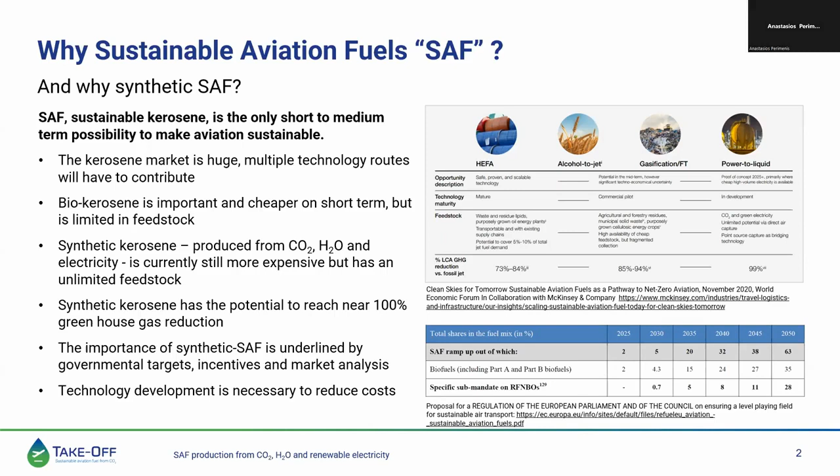So what we do within Takeoff is that we are developing a unique technology whereby CO2 is hydrogenated to kerosene via olefins. So we start either from flue gas emission or direct air capture, where CO2 is captured, and combine it with hydrogen, convert it to light olefins, further oligomerize it and hydrogenate it to higher alkanes, which is the blend of the stuff. The innovations are focused on developing and improving catalysts with high selectivity and efficiencies, next to reactors under industrially relevant technologies.

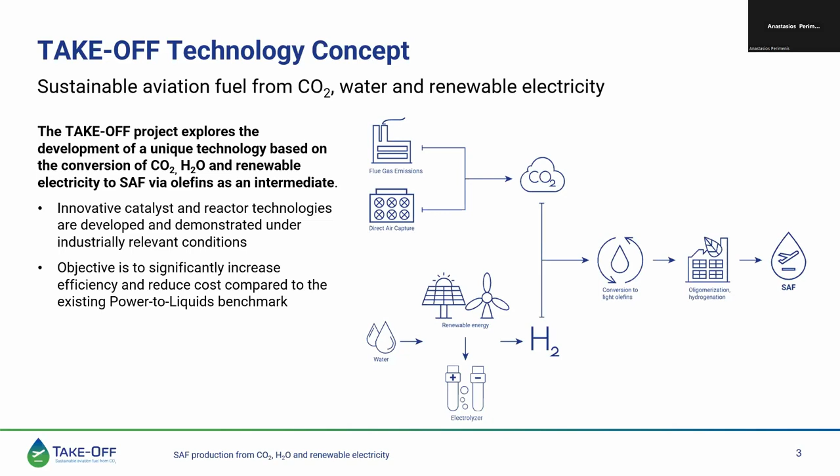So here we are working, for instance, with reactors that remove the water to shift the reactions to the right, so to produce more products than limited by the thermodynamics. The objective is to significantly increase the efficiency and reduce cost compared to the existing power to liquid benchmark, which is at the moment the Fischer-Tropsch reactions. So compared to the benchmark, we know that Fischer-Tropsch is industrially proven and certified for use as aviation fuel. This route is therefore the industrial benchmark for our comparison studies.

And we must say that we are not against, and we are not competing with the FT technology, because we also work on the reverse water gas shift reaction for producing hydrogen and CO at the right ratio. This is an important parameter to control the reaction output, because, for instance, for kerosene, the ratio of hydrogen to CO is 2.1.

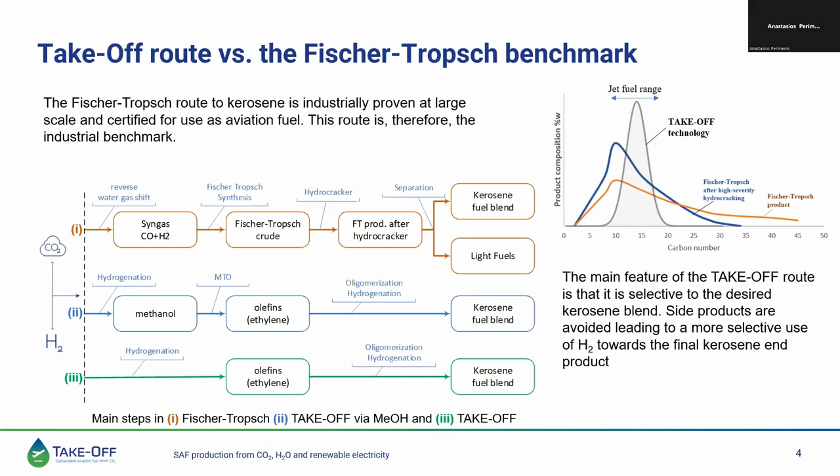RWE premises. The compliance and emissions, so our partners at FEV in Aachen are working on the structure property relationship, and then to see how to minimize the emissions, soot and NOx, etc. Techno-economic analysis and life cycle assessment happens at the SDU, at the university in Denmark. Disseminations is in the hands of CO2 Value Europe.

So to give you a glance of the experimental setups that we have and that we are using for executing our experiments. So we have the demo plant in RWE. We see here a rapid compression machine for NOx measurements. We see a oligomerization test where you have polymerizations of light olefins to higher olefins. And you see also our reactor.

We call it SIENNA for the removal of water, and then the production of methanol or DME, which is then further reacting. But at the moment, we are also working on how to go directly from CO2 and hydrogen to light olefins.

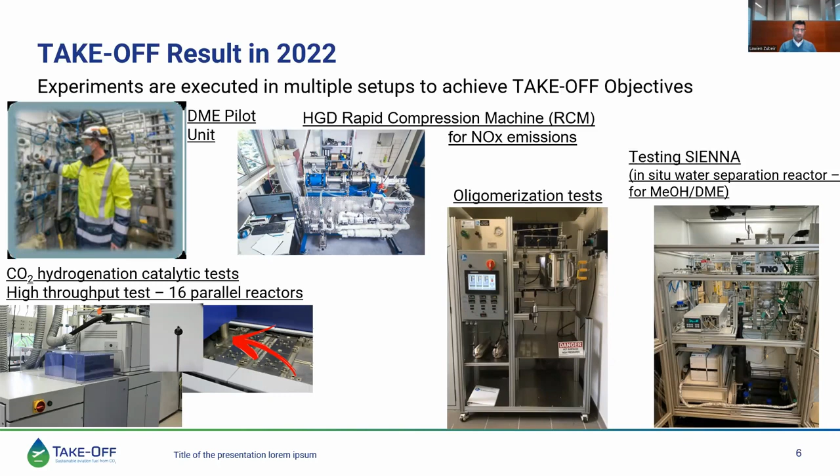So what do we expect from this research? What's the impact of the TAKE-OFF project? Well, there are a couple. So we are developing the process for the conversion of CO2 to methanol and DME and increase the technology readiness level from 3 to 5, because these intermediates can also be used in other markets. They have their own markets.

Advance an innovative olefins to jet fuel process from TRL 3 to 4, and investigate the compliance and emissions of the produced SAF, because we want to use it as a drop-in product. So it must, of course, comply with the existing requirements. We want also, within the RWE premises, to demonstrate the entire technology. So from CO2 capture, water conversion to hydrogen using electricity, and converting it all the way to kerosene.

And the techno-economic analysis will be in place to, of course, determine the efficiency, the footprint, and the sustainability and cost reduction of these processes. We expect a carbon and hydrogen efficiency of 25% above Fischer-Tropsch, because we have a narrower product distribution for the jet fuel blend. We don't expect sulfur because there's no sulfur in the feed. There will be also no sulfur in the product. Lower emissions, because the product is more optimized than the usual one that's used now.

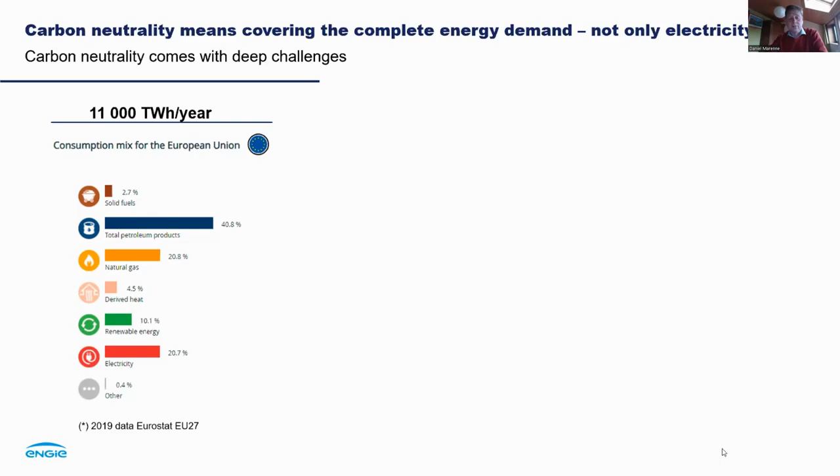Only 20% of the final energy use is today electricity, and the rest is a bit of renewable, 10%, but for the rest it's fossil fuel with petroleum and gas. And electricity will increase, because this is the cheapest way to achieve carbon neutrality, to electrify everything that is feasible. But some things are not feasible to electrify, and also you can electrify, but at the end of the day you need cables or infrastructure, and the infrastructure will not be sufficient.

So that's why we will use renewable heat and more, but it will remain quite limited, because simply the feedstock is limited. Carbon capture and storage, we see now that it's running, and it will continue. And hydrogen and power to X, like CCU, will take a place, but be aware that it is a very expensive way, because it is more expensive to use hydrogen than pure electricity, simply because you need to use electricity to go to hydrogen. So from an efficiency point of view, you will go only in the hard-to-abate sectors, where you cannot electrify.

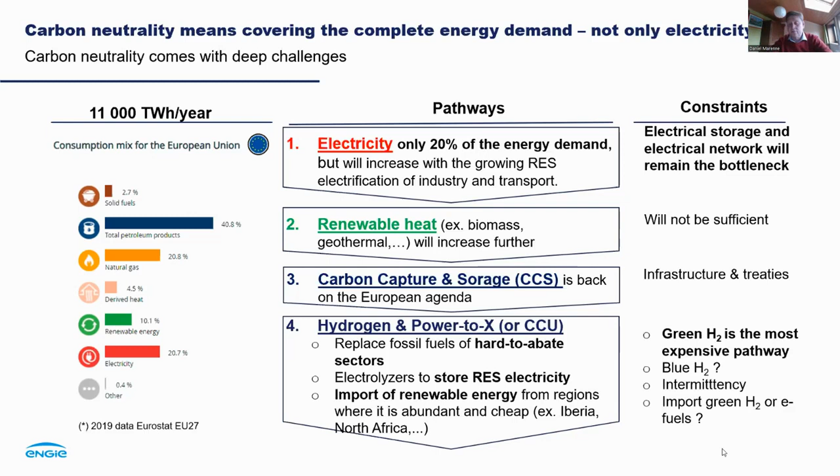So that's why for e-fuels, what we clearly have to target is where you cannot use electricity. For a single car, for instance, an electric car seems to be better, but for trucks and for aviation, clearly it's another story.

REPowerEU and the current stress on the energy market have shown at least one thing: we have to accelerate absolutely and desperately the development of all the renewable electricity that we can in Europe. Clearly the development will be wind and solar. Wind more for the Atlantic part, with the UK, Ireland, and all the North Sea coast up to the Baltic Sea, and a bit in the Mediterranean Sea also, as you see. And solar will be more in the south, of course, because there is more sun in the south. But once more, these are not base load production.

So if we want to increase that, we absolutely need to develop some storage capacity for electricity, or simply transform the electricity produced, as fast as possible, into a valuable molecule that can be used afterwards for the rest of the economy.

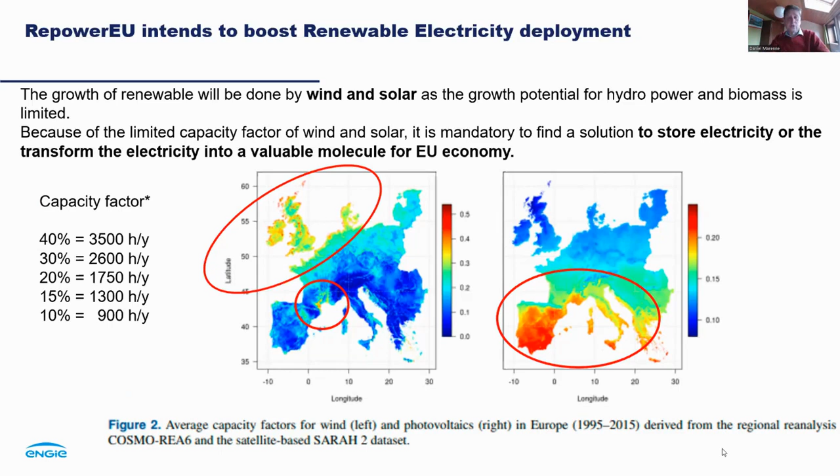When we speak about the storage of electricity, you see that there are lots of possibilities, like batteries, of course, pumped hydro storage, thermal storage, because we will more and more see electric boilers that transform electricity directly into heat to use it, or eventually to produce electricity again. And then we have hydrogen and eventually power to methane, which allows storing a large quantity of electricity that can be used afterwards.

But of course, due to efficiency, the best is most probably not to use this molecule directly to reproduce electricity, because you lose a lot of energy. Power to gas to power is about 30% efficiency. So if you produce 100 megawatt hours of electricity with solar, for instance, transform it into hydrogen and go back to electricity with a CCGT, gas, or hydrogen, you will have only 30 megawatt hours of energy. It means that you will lose a lot. So if you can produce some other valuable molecule, it is much better than going back to electricity.

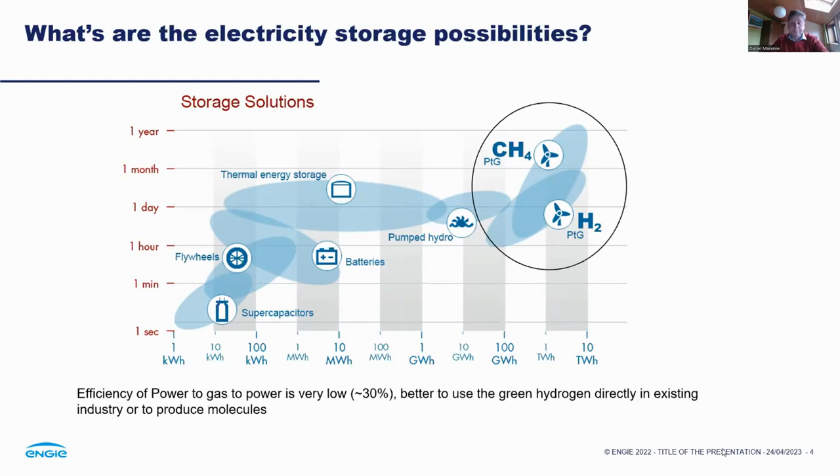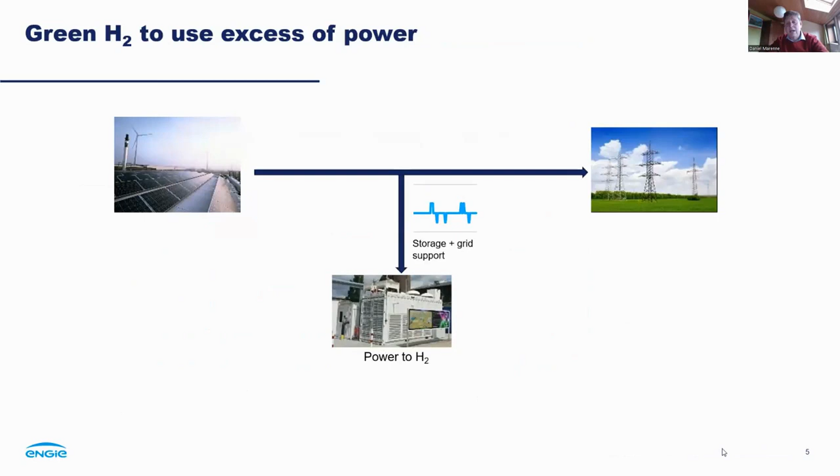So basically, that's where the hydrogen will play a role. So you have a lot of electricity, you don't know exactly what to do, then you transform this electricity into hydrogen. Then today, you can ask yourself, okay, what can I do with this hydrogen today? So today, you can use the hydrogen for two major sectors, I would say, in Europe. This is the ammonia production for basically fertilizer, and these are the refineries.

The problem is that today the ammonia sector is absolutely not ready to pay any premium on green hydrogen. We see, by the way, that with the increase of price of the gas, the first installations to stop activities were the ammonia production, basically everywhere in Europe. In UK, I saw an ammonia plant just shutting down because of the price of energy. So clearly, there is no willingness to pay an additional premium for green hydrogen for the ammonia, at least in Belgium.

The refinery: clearly, we will electrify more and more the mobility. So as a consequence, the refinery will decrease. So basically, we will need less refinery, but for the refinery, clearly there is a willingness to pay an additional premium on green hydrogen, because simply they can sell it then as green fuel. So it's a sort of CCU, I would say, but with existing assets. You have, of course, new assets where you can use green hydrogen.

This is the green steel, so the DRI, direct reduction iron, to replace the current blast furnace. But as it is to replace blast furnace, it means that you need a lot of investment upfront in order to develop this technology, and without infrastructure, it's quite challenging to develop these things, because you need a lot of hydrogen for the steel production, and if you have no transport and storage infrastructure, it will not be developed.

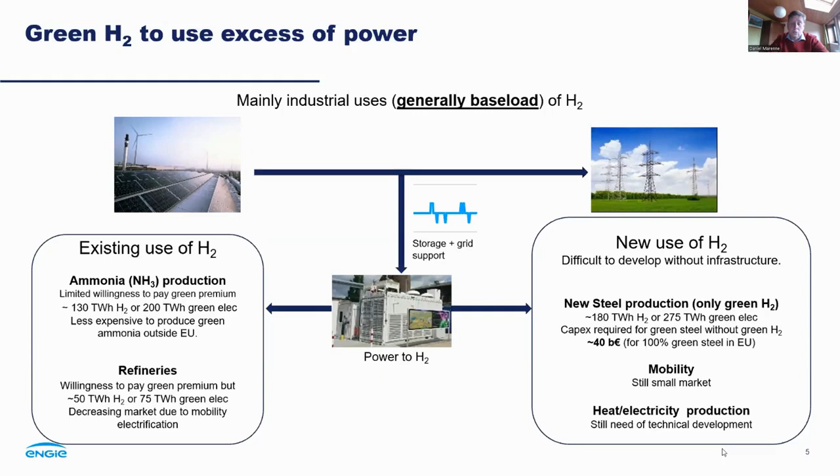And then it comes to another challenge with the hydrogen economy: today there is very, very limited infrastructure to transport the hydrogen, so it has to be developed, because simply this infrastructure is only sized for the current use of hydrogen. So if you want to develop, you need somehow to have a business model. And also, to store the hydrogen in big quantity today, the only proven way is a salt cavern, but it's not used for hydrogen today, though there are some demo projects and it will come.

But even if you imagine transforming all the salt caverns used today for gas storage into hydrogen, you have to keep in mind that with the energy density of hydrogen, you will lose a lot of energy storage possibility, because you divide by 4 the quantity of energy you can store with hydrogen compared to natural gas. So in Europe, today we have 1,200 terawatt hours of gas storage capacity, with only 200 terawatt hours in salt caverns. And if you transform these salt caverns into hydrogen, it's only 50 terawatt hours. So it will not solve the problem of storage of energy.

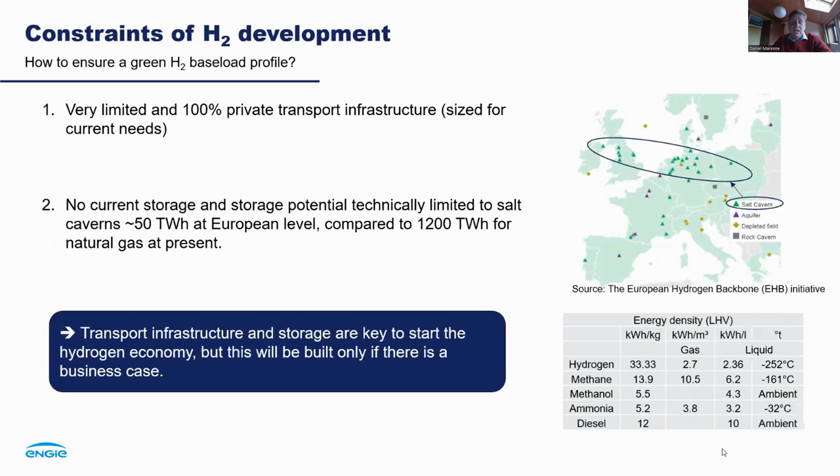And I will add to that, if you have no big project with big possibility to implement infrastructure and storage, you will never start, in fact, the hydrogen economy. So clearly, the hydrogen economy will need some, I would call it, iconic projects in order to develop this infrastructure. As I mentioned before, the business model is quite challenging. So who is really able and who wants to pay a premium? And that's where SAF and other e-molecules, e-fuels, come into consideration.

Today, it's obvious that in aviation, you will never go only with green hydrogen, because simply, once more, the energy density of hydrogen is too small compared to kerosene, and so you will always need kerosene for your planes. And as mentioned by the previous speaker, it's a lot of energy.

If you take only the 5% of renewable SAF, so bio and e, that is needed in Europe in 2030, it's already 40 terawatt hours. So it's a big volume.

In the shipping industry, you have the same trend. Shipping is now also pushed by Europe to add some renewable fuel. So you will have LNG, methanol, eventually e-diesel. But today, obviously, we see mainly e-methane and e-methanol as candidates to go for carbon neutrality. And once more, it's also a huge volume.

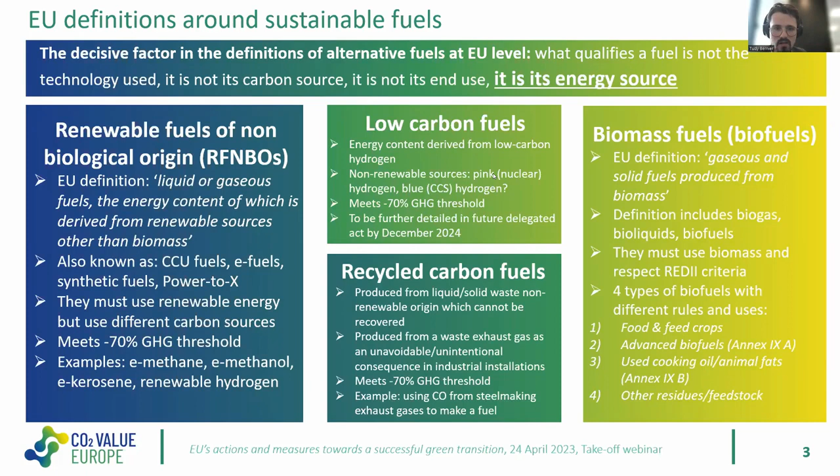And then the last ones, as was already mentioned, under EU law these are referred to as biomass fuels. This is essentially biofuels. You have a number of criteria that must be respected under the Renewable Energy Directive revision, so we refer to it as RED 2. There's 4 types of biofuels that can be in there, but maybe more relevant to this group and to this webinar are the definitions for sustainable aviation fuel.

So we hear a lot about SAFs. We have to bear in mind that SAF is the umbrella term, right? So it's all the fuels that are considered as sustainable, and it's essentially 3 of them. So it's synthetic aviation fuels, which is effectively RFNBOs for aviation. So what I just mentioned, you have your energy content that is coming from renewable sources other than biomass. And then for biofuels, it's only 2 categories that are considered, at least in the proposal that was made by the Commission.

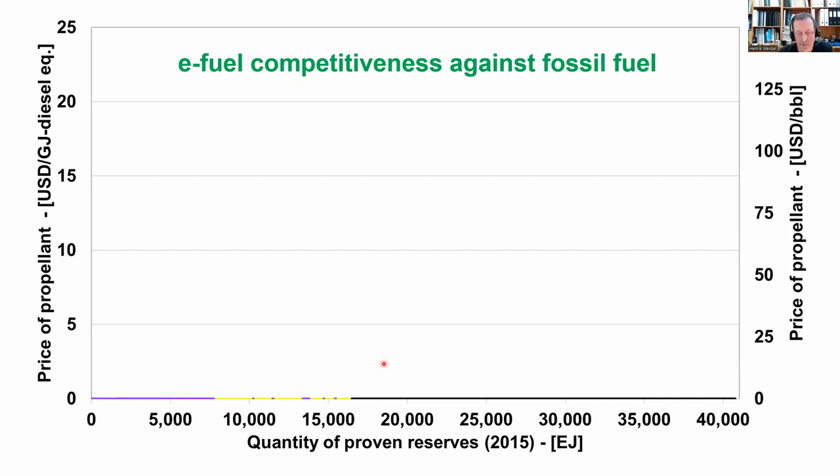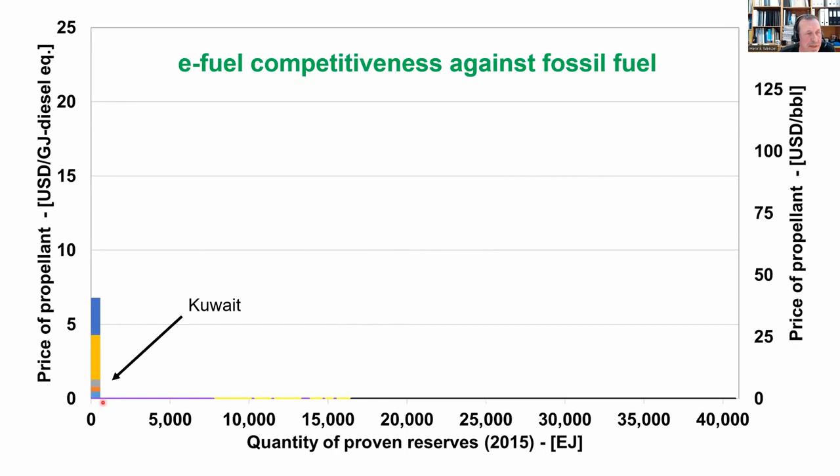So the cheapest place, this is country by country, the cheapest place in the world to produce a diesel equivalent out of fossil fuels is Kuwait. The first three contributions in the bar graph here are the mining, the capex and opex and administration of mining. Then the orange is the refining, and the blue is the distribution logistics until the fueling. So this is the cost of producing a diesel from the Kuwait reserve.

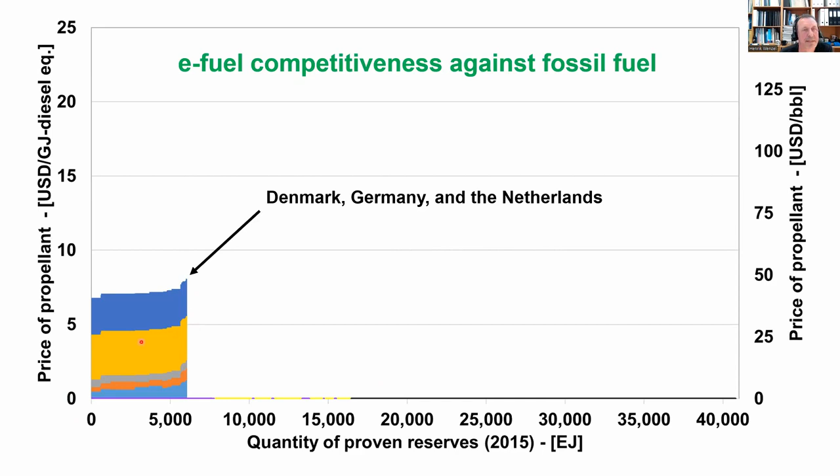The next is Oman, smaller quantity, a little bit more expensive. And as you go, here comes Denmark, still the oil reserves, small quantity together with Germany and the Netherlands. If we go to Canadian oil, this is the shale oil that is pretty much more expensive. You see, meanwhile, you have the gas reserves here where the refining part is bigger because you need to do gas to liquid, which is more expensive.

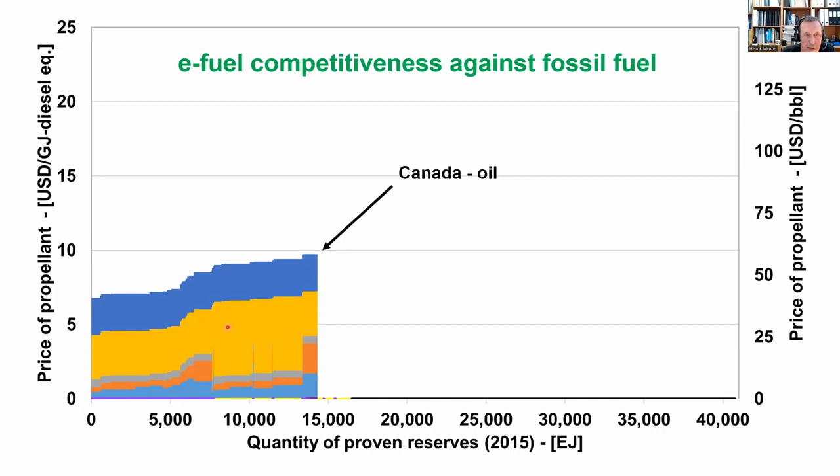Looking at the coal, the Russian coal is the cheapest coal reserve to do this from. A bit more expensive, and all the way up to the most expensive, which is the South Korean, Japan, Turkey, and Iranian coal reserves. So that's the total sum graph of the cost of producing a diesel equivalent from fossil reserves.

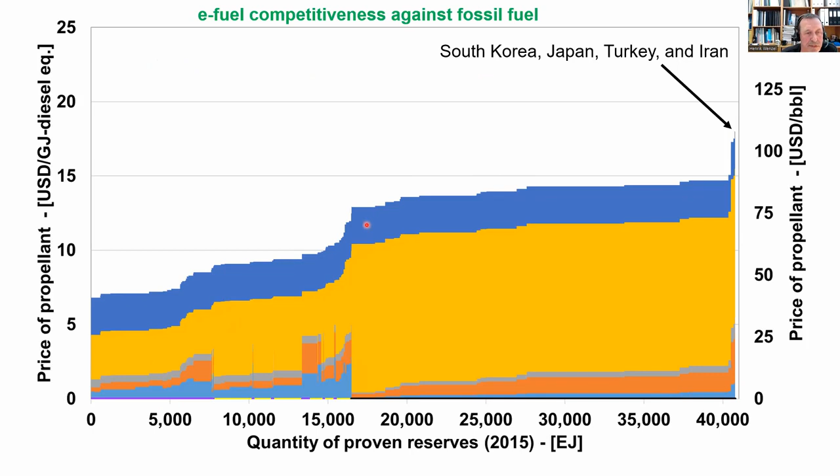If we are to stay below 1.5 degrees centigrade temperature increase, remember this was from 2015, we could only use what is to the left of this line. All the other had to stay in the ground, otherwise we couldn't make it. And for 2 degrees, this is the quantity. So that allows us, of course, to understand if we are to find sustainable alternatives that can outcompete these on pure market terms, what should be the cost of those?

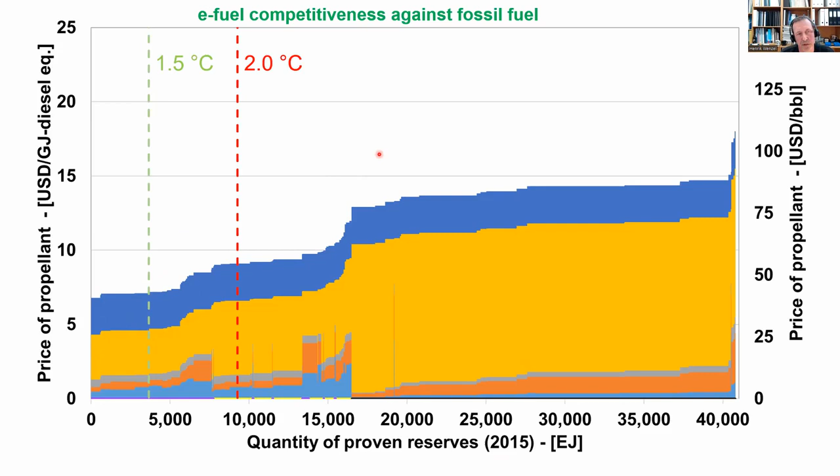And if we take a look, this is it. So to succeed in competing with our sustainable alternatives like the e-fuels, just on a pure market competition basis, meeting the climate target of 2 degrees, we need a cost of something around $9 per gigajoule of diesel equivalent, and something around 7 if we are to stay below 1.5. So this is kind of a nice target to understand.

Can we do that is the next question. We studied a huge variety of biofuels and e-fuels and even electrification and so on to understand to what extent could we do this.

And the lowest cost of e-fuels, electrofuels, back then we found was $22 per gigajoule diesel equivalent. That is equivalent to $0.75 per liter. And that was assuming an electricity cost behind the hydrogen production of $18 per megawatt hour of electricity. That is equivalent to very cheap solar power back then. As those of you who know these numbers will realize, this is pretty cheap.

This is, of course, diesel, but the proportion, if it were to be jet fuel, is just about the same. So you see, this is from 2.5 times more expensive than the cheapest diesel to 50% more expensive than the most expensive diesel. So it is a pretty cheap aviation fuel that we have assumed here by 2040. It is difficult to get cheaper than that. Let's take a look then. I'll go back to what it would take in terms of preconditions to then be competitive anyway.

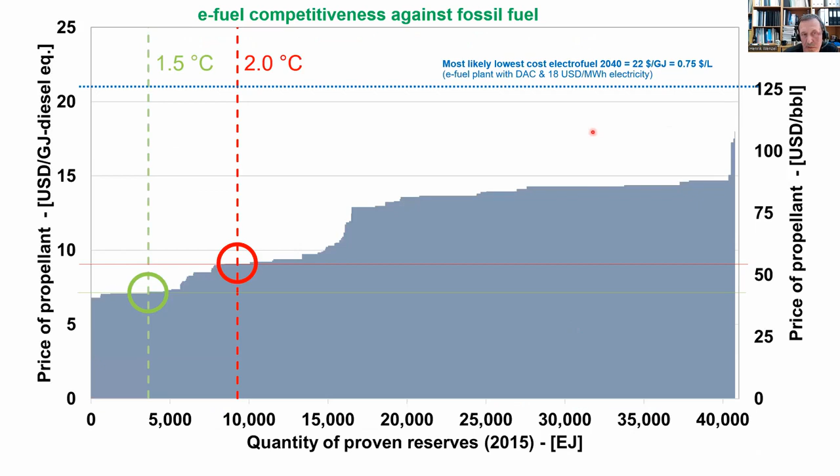We also tried looking at how much we should lower the electricity price compared to the assumed price we had from before, the $18 per megawatt hour of electricity. How much lower should that be if e-kerosene produced from hydrogen and Fischer-Tropsch should be competitive? And what we found is that to meet the 2 degrees centigrade target, assuming even that the CO2 is free, we would have to have a cost as low as $4.57 per megawatt hour of electricity. Then we would be competitive.

And to meet the 1.5 degree target, $0.32 per megawatt hour, meaning almost zero cost electricity. And of course, we have to pay for the CO2 to capture it as well. So that will increase, we would need negative electricity prices in this case.

And to understand why it's so difficult, you just have to imagine the physical issues here. If you want to produce an e-fuel, an e-kerosene, you have to buy a solar plant or a wind turbine or something equivalent. You have to invest in a grid. You have to buy an electrolysis. You have to capture CO2. You have to invest in a reverse water gas shift and in a Fischer-Tropsch and all that.

And after that, you have a syncrude that is very close to being similar to the fossil crude oil that you pump out of the ground. So all these investments should compete with a pump, if it comes from oil at least. And that's difficult.

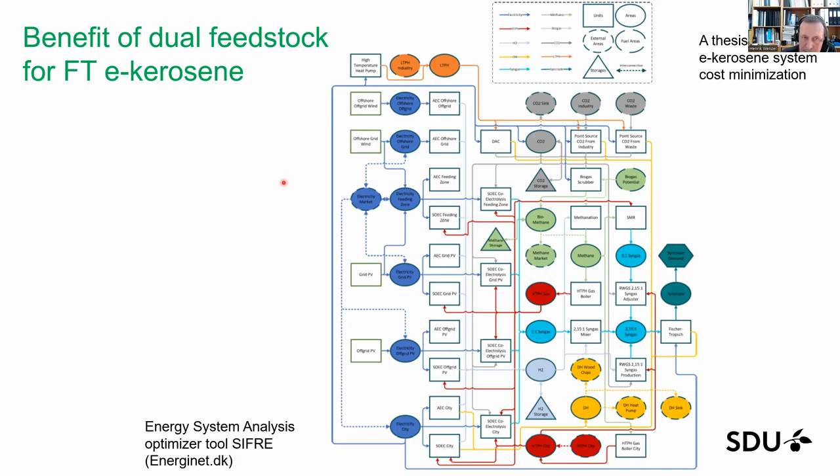electricity costs, etc. Then the model will come out with the distribution of what has been invested in and what the levelized cost of energy of e-kerosene ends up being in these cases. They modeled like 9 scenarios here. The winning scenario was this one. So it's producing jet fuel out here and naphtha, some tail gas, and the heat is used for district heating. Most of it, not all.

What you see is we have a biogas supply going through a biogas scrubber where the CO2 is extracted. The biomethane goes into a steam reformer, and the hydrogen to carbon monoxide ratio is adjusted by reverse water gas shift to use some of the excess hydrogen from the steam reformer with CO2 to get the right ratio of 2.15 to the Fischer-Tropsch. Furthermore, electrolysis and a lot of CO2 that is available is used in reverse water gas shift to produce a syngas. Also, a co-electrolysis pathway is used to directly produce syngas from CO2 and hydrogen.

So that is the pathway, and we ended up. You see the size of the flows here, that there is a significant flow of biomethane that will go through steam reformer into the Fischer-Tropsch, as well as the syngas from co-electrolysis and reverse water gas shift. And that was interesting because the optimizer could as well have set this to 0. So why is it that also biomethane is used here?

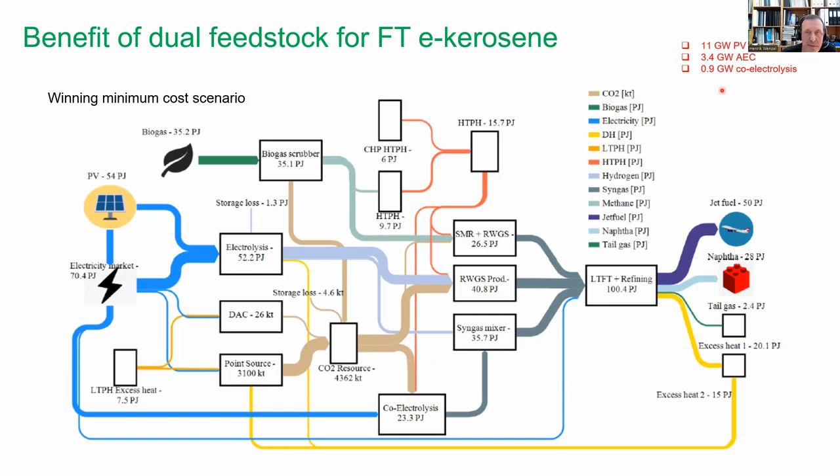By the way, it also shows between the electrolyzers, it shows mainly alkaline electrolyzer due to the lower investment cost, and some co-electrolysis as well. And these are the costs. And the cheapest scenario was this one out here, and they found a levelized cost of e-kerosene of 1.2 euros per liter. And that is about twice the fossil kerosene market price today, which is lower than we see in most studies. But this is because this is looking ahead to 2040, and it is because of the assumed lower electricity prices we assume at that time.

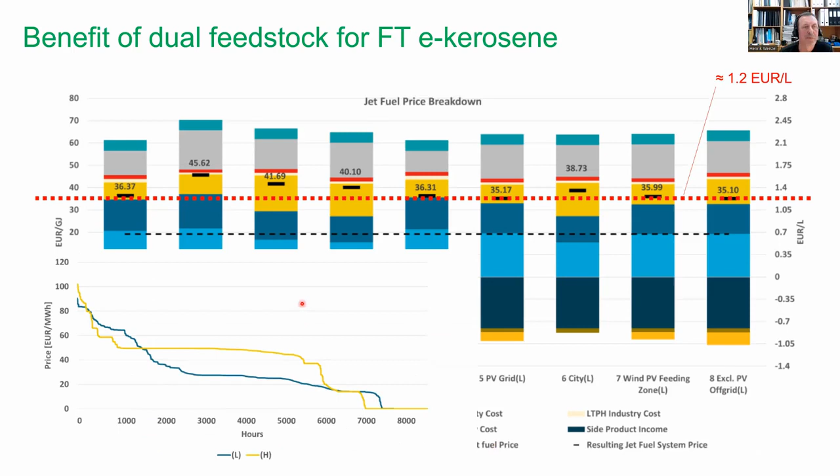Here we have two curves from the international collaboration project called TYNDP, done in 2020, doing scenarios for 2040. It's a collaboration between European transmission system operators, including the Danish one, Energinet. And the scenario that was recommended by then was the blue one, where you see the frequency function over the 8,760 hours per year. Here, that has a plateau around 30, 35 or less, 20 something euros per megawatt hour of electricity. And then some hours of very low prices. This is called the national trend scenario for 2040. And this is called the distributed energy scenario.

And what this study found was that there is a break-even point at around 30, 35 euros per megawatt hour, where the syngas would be produced from the electro pathway, either the reverse water gas shift or the co-electrolysis, and below. Sorry, it should be above this price, it would choose to produce biomethane instead for the syngas production, and that would be equivalent to producing 75% of the syngas from the e-pathway and 25% from the bio pathway. Because when electricity prices on the grid are higher than 30 to 35 euros per megawatt hour, it pays simply off better to sell directly to the grid than to produce the e-kerosene from it, or to produce the syngas.

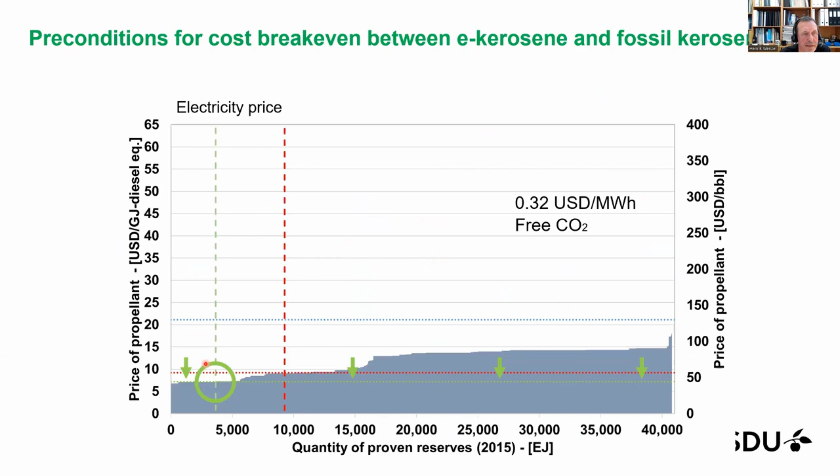Okay. And I do think that, I mean, I understood that the cost of like $5 per kilogram of hydrogen is not unrealistic also today. And that is actually where the curve is starting. Oh, that's maybe too far back. Yeah. This is equivalent to close to $5 per kilogram. Okay.

And another question from Pietro Garato is, when the price of electricity is lowered, would this not only lower the cost of producing e-kerosene, but also the cost of producing fossil kerosene? And whether this has been considered in the analysis? I don't think that electricity price is a very big contributor to producing fossil kerosene.

Okay. And another question from Tom is whether the costs that you have shown on RFNBO production are considering also compliance to the delegated acts that govern the production of RFNBO so far.

I'm not sure I understand that question. I assume it might mean whether, let's say, the delegated acts that show that they need the RFNBO need to be 70%, for example, less greenhouse gas emissions than the fossil equivalent. Is this also considered in your analysis? Yeah, implicitly it is, because we are here looking at 2040, maybe even 2050, and by then we can assume that we have at least that degree of renewable electricity in our system.

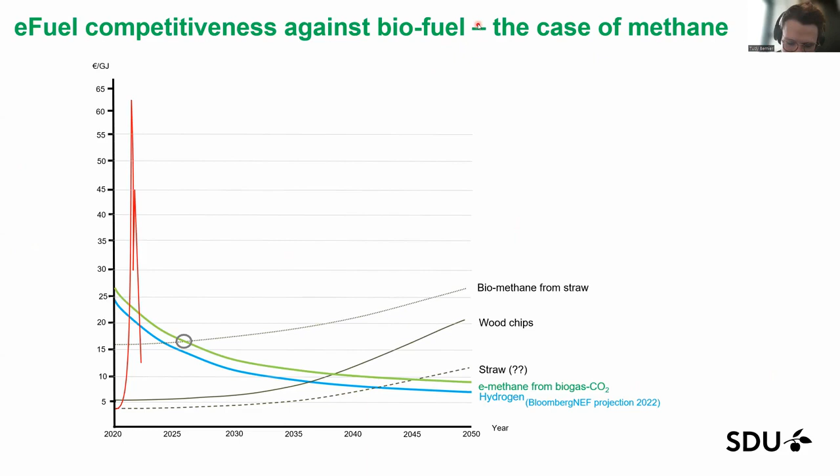Sorry. I just wanted to make a slight precision on something that I said earlier about the mandate and who is responsible. Having a look at the legislation again, we're still waiting for the final legislation to be out. When the final legislation is out, we'll know for sure. But just for everyone to have it clearly in mind, essentially there's two types of penalties. The major penalty is going to be on the fuel supplier, and then there's a smaller part of the penalty that is going to be on aircraft operators.

But if we face it, in the end, some of the prices and of the risks will still be passed to the aircraft operators. But just so that I'm clearer in the answer that I gave: the main penalties are for the fuel supplier, then a part of the penalties on aircraft operators, formally in the legislation. Okay, sorry, thanks. I just wanted to make sure that I got that right. Thanks, Tudi, for this clarification.